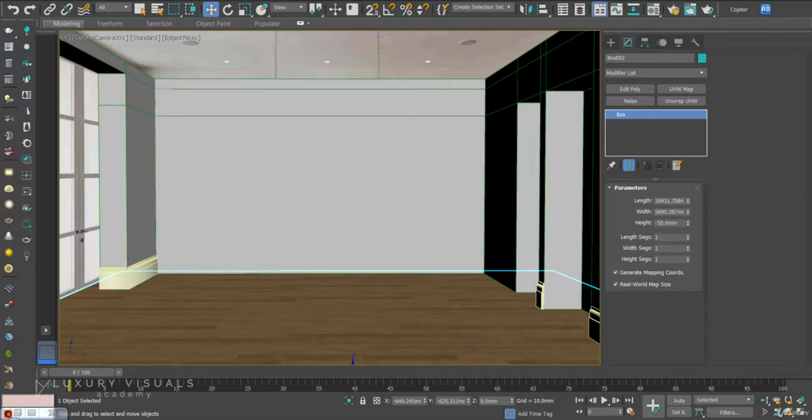Cool, so we're looking good. Now let's take a look at making these cupboards.

Let's create a box, and with snaps turned on, let's just pull that across and up. And I'm just going to make that 700 high.

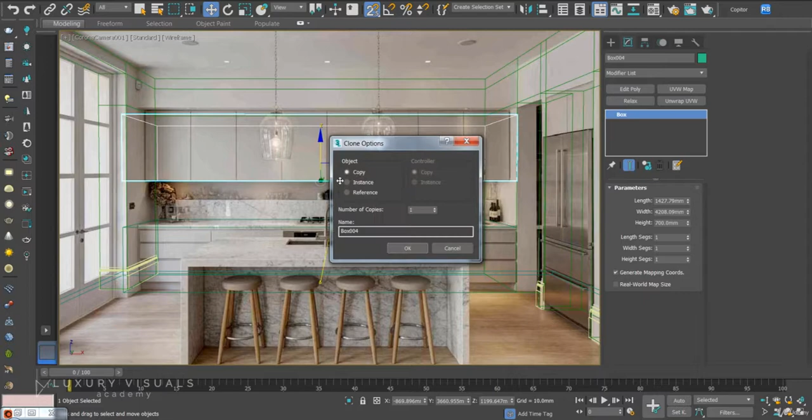And I'm just going to hold shift and pull that up to where these cupboards will be as well, and make that a copy. So the tops of these cupboards are actually in line with the tops of these doors in our image. So what we can actually do, let's go to the front view and let's just snap that to the top here, and let's make that minus 700. Go back to the camera view and let's actually make it minus 800. You can see that that lines up nicely.

And I'm going to snap and I'm going to grab this bottom box again, and in the front view, holding shift, snap that to the top and make that a copy. And I'm going to make that height 300.

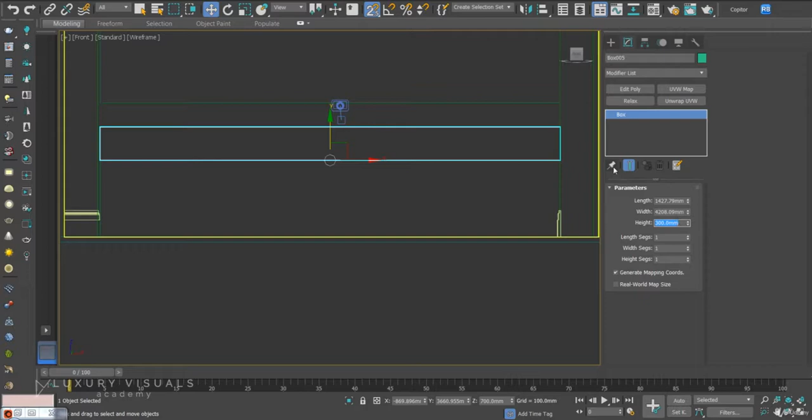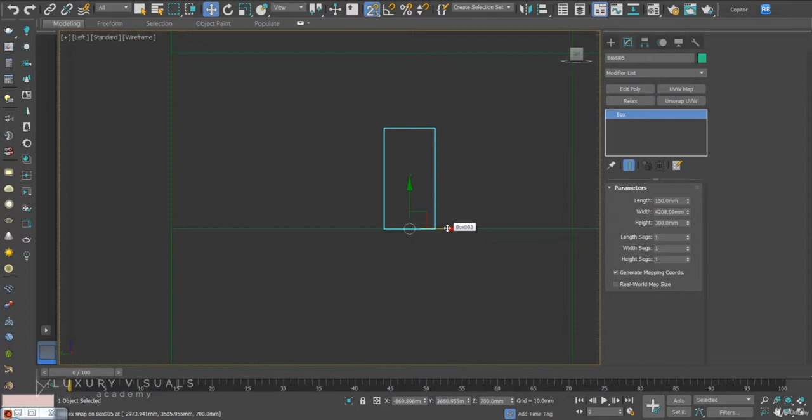And back in the perspective, I'm going to make the length 150 millimeters. In the left view, let's line this up. So with F3, turn that grid off, and we can put that here.

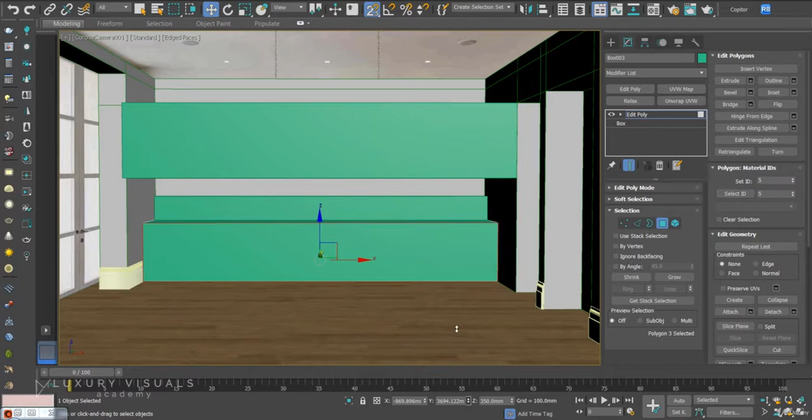And now I'm going to put an editable poly on, select polygon, go to the camera, select here. Now again, you're going to find it hard to select the y-axis, so we can just use the one down here, and that's going to pull and push that forward. So I'm just going to turn on, press F3 to turn on wireframe and line that up.

And let's do the same. I think they're going to be the same width, so I'm going to add an editable poly. I'm going to select these faces and I'm just going to snap them to the box below. So now you can see we've got our cupboards in place.

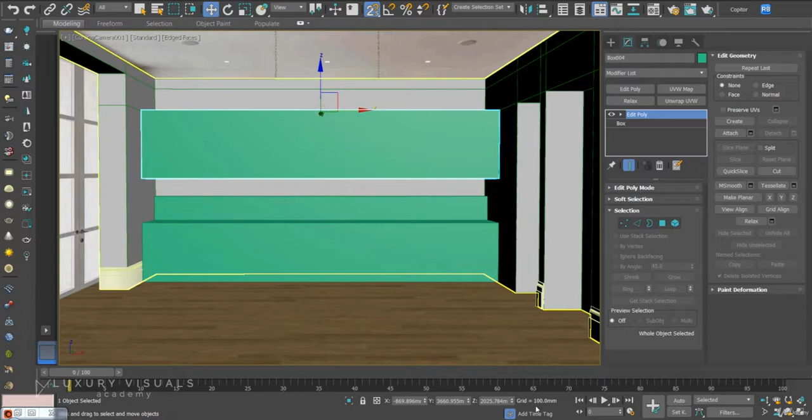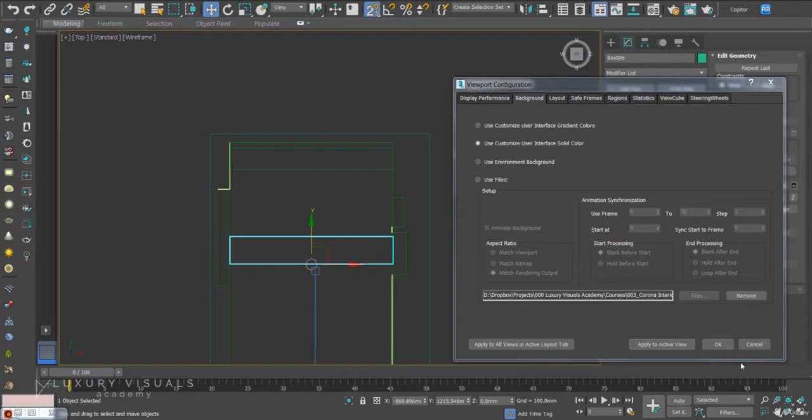And again, I'm going to press F3 and in the top view. Now this island in the middle, I think it roughly lines up with this fridge here. So if we go to the top view, and I'm going to hold shift and pull that out, and it might be tough to see. Let's just turn off the background image and apply that, and I think around about here.

And again, let's just go back to our camera view. I'm going to hit Alt B and turn back on our background image, apply to view. Make sure our snaps is on as well. And now in the Y, I'm just going to line up that front line.

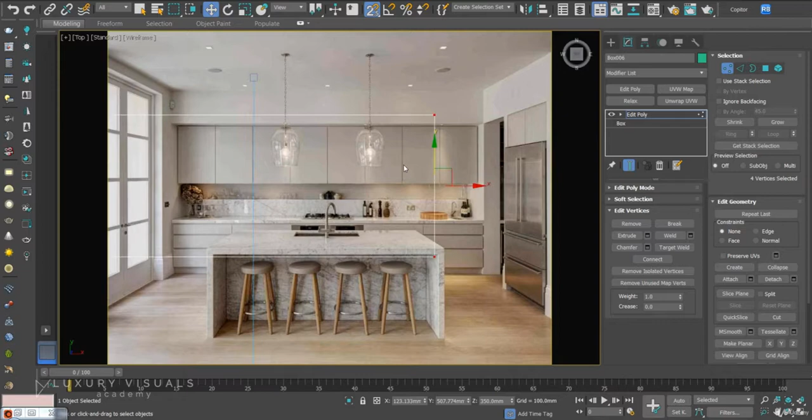And I'm also going to select these, pull them in. So just in the top view, it's pressing T. Let's select these, go back to our camera and use these dialogues to pull them in. And let's select these rear parts and let's pull them back as well. And press F3. We're starting to get some shape to our furniture.

So we could actually bring this countertop down a little bit. So let's bring that to about here. And that in turn will bring the shelf down, but we can, with snaps on, just snap that to the top of the counter. And I'm just going to hold shift again. We're going to create a countertop, so I'm holding shift and attach that there, make that a copy, and down in box, I'm just going to make that 125 mil. That'll do it.

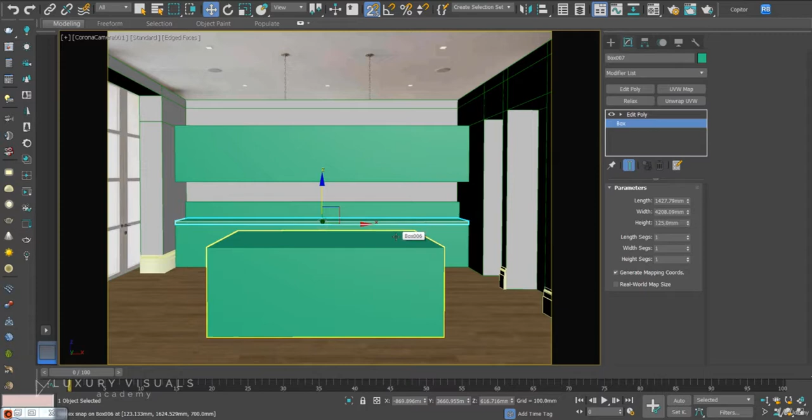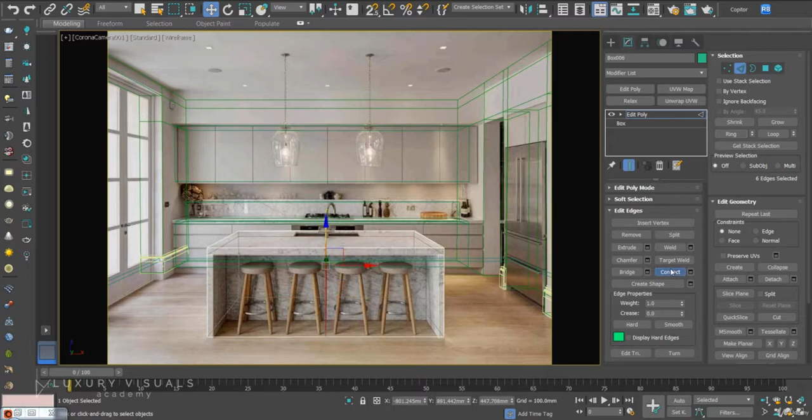So that's cool. And now with the island, let's select this face and we're going to hit ring, connect. Okay, turn off snaps. I'm just going to eyeball that to the front edge here, and same, let's ring, connect. In fact, let's hit the dialog and let's add 2. I reckon we can make this about 92, and we'll select the face, delete that one, this bottom face.

And then we can select this edge here and here. In the perspective, we can hold shift and just pull these edges in, go back to the camera view, and in the Y, let's just line that up. I'm going to hold Alt and deselect this top edge, and then if I hit bridge, that will make the back. So we are making progress.

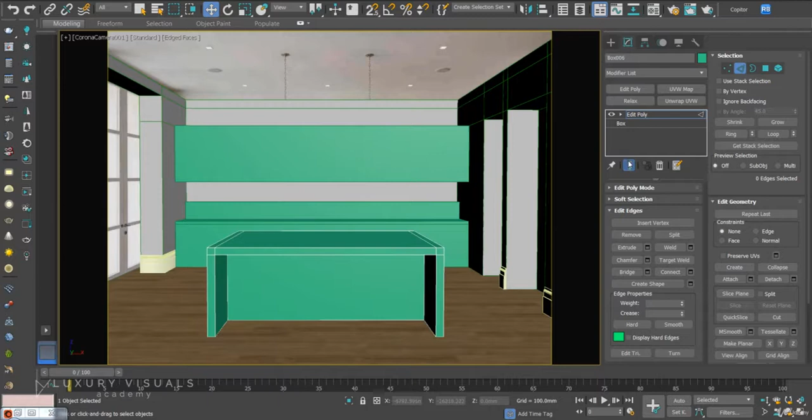And we've also got some cupboards up here, so let's turn off this edge, select this and rotate it by 90. That's not snapping, so I'm going to cancel that, turn on angle snaps and rotate it by 90. Make that a copy, pull that over here into position, in perspective.

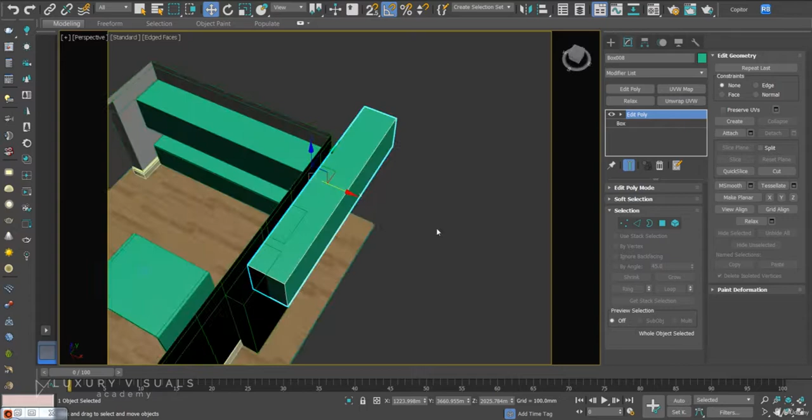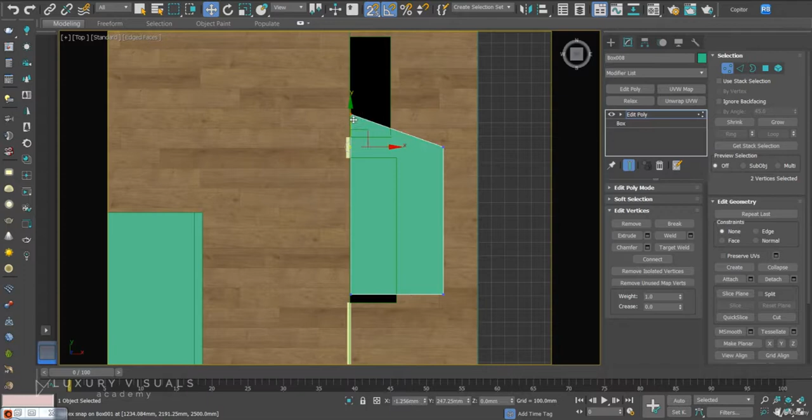Let's bring this over and we'll select these edges, holding snaps. Just going to line that up with the inner edges of the fridge. And also in the camera, F3, and we'll just line this up as well, so you can turn off snaps for this.

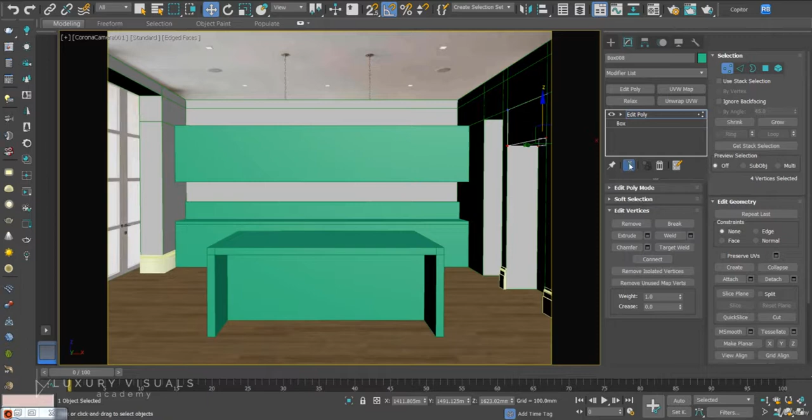Alright, so next up we're going to install Copitor, so we'll see you in the next video.